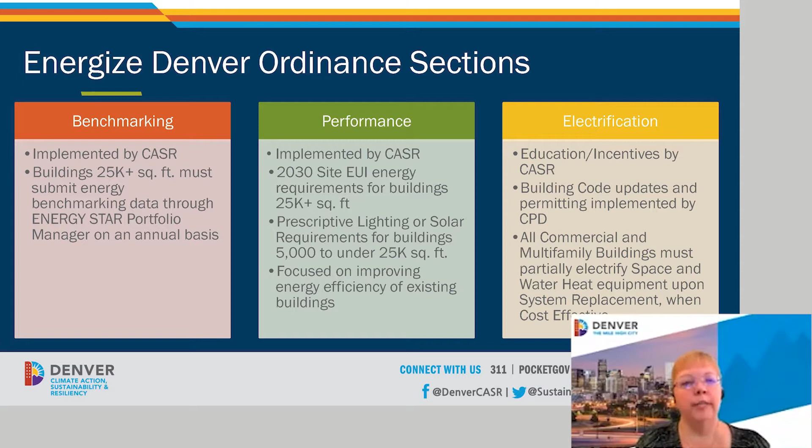Thank you. So like you said, I'm going to go over the ordinance and all of the sections and requirements that are in the ordinance. Let's go to the next slide. So it is split into three sections. The first section covers benchmarking, which we've done for a while now. The second is brand new, and it talks about performance targets. And I'm going to go into that in so much more detail, but this is just a summary slide. And then I'm going to go into very briefly the electrification requirements that are going to be built into the building code over the next 10 years.

So just a little bit of background. Go ahead and go to the next slide. So we have climate goals in Denver, which is the impetus for this particular ordinance. We've committed to eliminating greenhouse gas emissions by 2040. And for our buildings and homes, that means that all new buildings and homes need to be net zero energy by 2030, and all existing buildings and homes need to be net zero energy by 2040 if we're going to reach our goals.

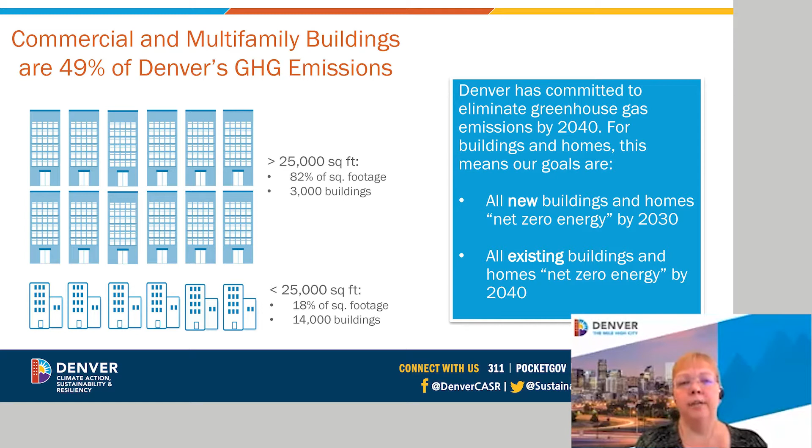Most of our greenhouse gas emissions are coming from our larger buildings that are over 25,000 square feet. It's actually 82% of our square footage that come from this particular group. And then we have a smaller group that has smaller buildings that is only 18% of the square footage. So in order for us to meet our goals, most of our performance requirements focus on reducing greenhouse gas emissions from the larger buildings.

So there are benefits for building owners and occupants. If we look at the avoided social cost of carbon, reduced utility costs and return on investments, that kind of thing, we will provide over $1 billion in benefits to the city as a whole. As buildings improve their energy use and lower the cost of operations, we'll become a more attractive city for businesses and residents. It also improves your return on investment, your property values, improves the building stock in the city of Denver, reduces energy bills and cost of operations, and improves indoor and outdoor air quality.

Next slide. So we put together an Energize Denver task force last year, worked through most of 2021, and gave them a goal of how do we achieve that net zero energy by 2040. And the design of this ordinance is what came out of that task force. They focused on improving health and equity outcomes, creating jobs, and driving climate solutions. So they had many task force meetings, lots of working groups and side meetings, and we looked at best practices across the country to be able to design this ordinance.

So I'm going to go into the first section, and it's the benchmarking section. So we have been benchmarking since 2016. It's all buildings 25,000 square feet and larger. You report your energy use to Energy Star Portfolio Manager. Our benchmarking requirements have not changed. So if you've done it in the past, it's the exact same requirements, and it is due on June 1st, which is only 2 weeks from now. So if you haven't submitted it, please make sure you do.

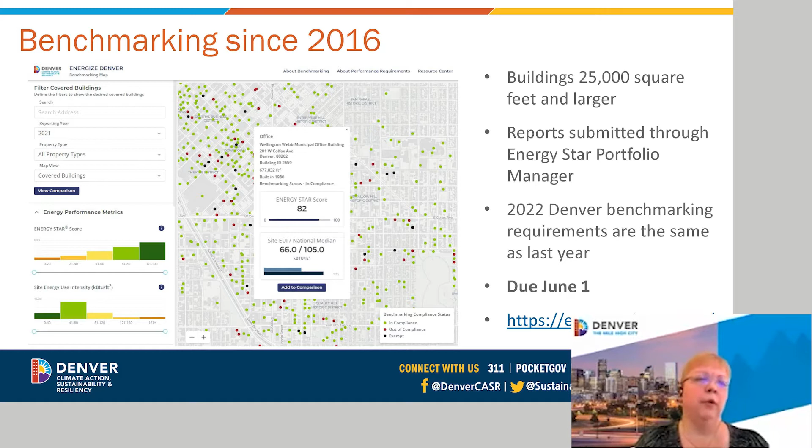We've also updated our benchmarking map at energizedenver.org to focus on site EUI and some other metrics. So if you'd like to go take a look at the new map, it's really neat and it has a lot more information than the old map did. So a new thing for this year is that the state of Colorado is also doing benchmarking for the first time. So they decided it was going to be buildings 50,000 square feet and larger.

It's done by the Colorado Energy Office. For this first year, it is due on December 1st, but then every year after that, it'll have the exact same deadline as we do on June 1st. They do have an annual filing fee, which is a little bit separate, different from us.

So if you're in the city of Denver or a city that already benchmarks like Boulder or Fort Collins, then we are actually going to submit your benchmarking report for you. So you send it in to us, we'll forward it to the state, but you then have to go to their website to pay the $100 fee to be considered in compliance. If you are not in one of those cities, you would just go directly to the Colorado website to submit your report.

So now I'm going to dig into the performance requirements, and this is probably where we're going to spend most of our time. The overarching goal for the performance requirements is to reach a 30% improvement in energy performance across all of those buildings by 2030. So to achieve that goal, we designed energy performance targets for 2030. This applies to all buildings over 25,000 square feet. It uses site energy use intensity, or your kBTU divided by square footage.

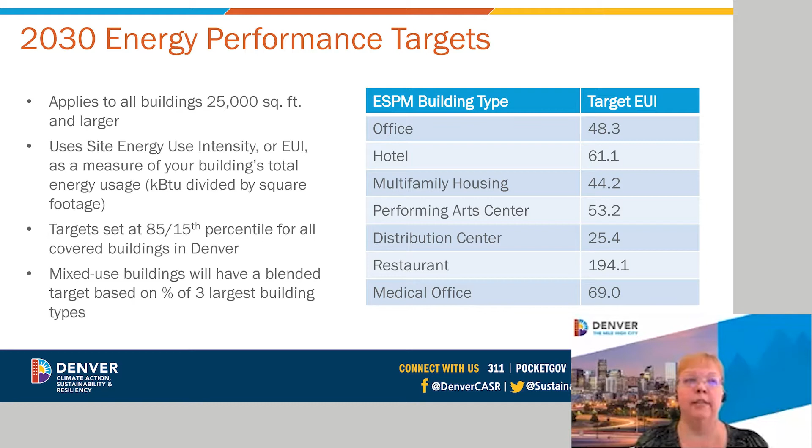So our unique building types were ones that we did not have a robust enough local or national data set to be able to set an EUI target. These include aquariums, convention centers, data centers, parking, utility, power stations, that kind of thing. And we just set a 30% reduction target instead of a site EUI target. Alternate compliance options are going to be important for this group because they may not be able to outright make a 30% goal. So if you are in one of these building types, you're more likely going to talk to our office once we design our alternate compliance options.

For manufacturing and agricultural, one of the interesting things about this group is that they have not been required to benchmark for the last 5 years, but we are going to be setting performance targets for this group. So we are setting up some focus groups to do stakeholder engagement over the next year with this group on how we get them to benchmark and then set performance goals that are equal to the 30% savings. So if you have one of these types of buildings, you will probably be hearing from us in the next couple of months to start that engagement process.

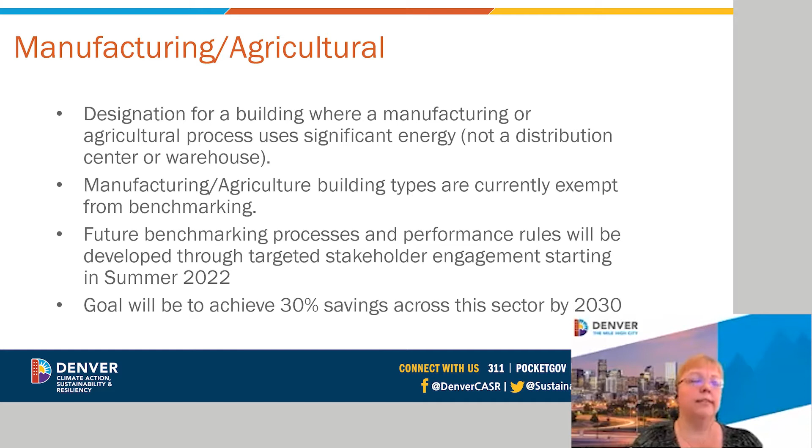So interim targets: we took that 2030 target and set a couple of interim goals to help all the building owners get to where they need to be in 2030. We set them for 2024 and 2027 by drawing a straight line from your 2019 baseline to the 2030 target and set those site EUI targets for those years. After you meet those targets, you have to maintain them. What is in the chart is what we are regulating. If a building wants to go faster, let's say get to your 2030 target earlier, you're certainly welcome to do this. This is just the minimum requirement: hitting those interim targets and then maintaining them indefinitely.

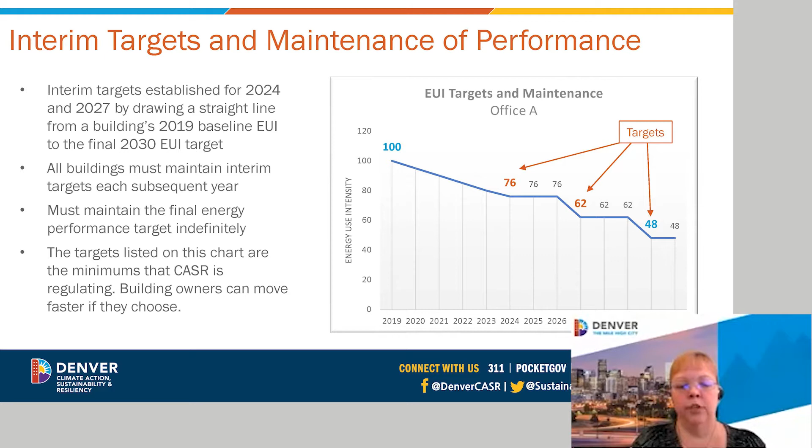So data correction, this is a really super important thing to be looking at for the next couple of months. Were you benchmarking your building properly? Your square footage is possibly wrong, or your property types are possibly wrong, or you are not accounting for high intensity spaces. Let's say you have an office building that is 90% office and only 10% restaurant. A restaurant EUI is in the 190s, so you could get a little bit of a break if you actually benchmarked that restaurant section.

It's not required by Portfolio Manager if you have less than a 10% property space use in your building, but what we're suggesting is that you do it anyways, because then your mixed-use target will give you a break on that restaurant instead of having to hit the 48.3 that an office is. So we want to make sure that everybody is looking at their benchmarking data very carefully over the next couple of months, and then asking for a data correction and getting the correct site EUI target assigned for your building based on what's actually in your building.

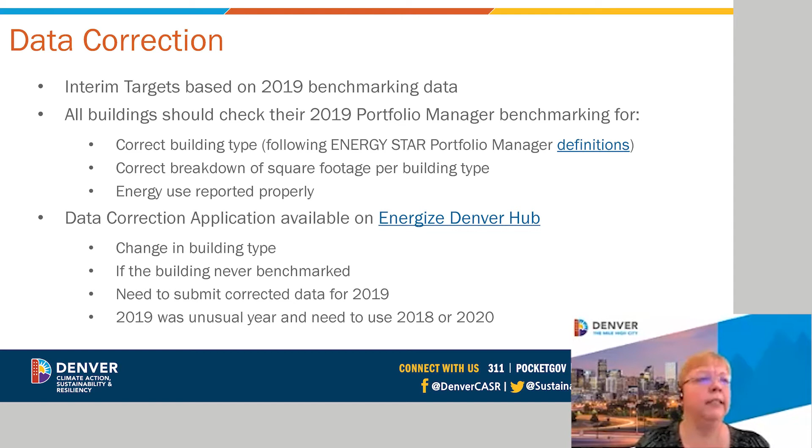So we also, as part of the program, have a solar credit. If you installed solar, it doesn't normally affect your site EUI. So if you're in Portfolio Manager and you put in your solar data, you will see that your site EUI doesn't actually change. It changes your source EUI. But what we want to do is give credit for local solar that's built and allow a credit off of the site EUI. We are still designing this credit.

There's some differences between the state and what they're designing on their performance credit. So this is not finalized yet. We are going to have a solar credit of some kind, but we still have a few details to work out and should be finalizing it over the next couple of months.

So our alternate compliance options: we are going to be allowing for inherent characteristics or specialized operations that might not be accounted for in your site EUI target. Over the next month or so, we're going to finalize some of these details on what could possibly be allowed to adjust your target. We are also going to allow timeline adjustments.

Let's say you have a major renovation planned for 2028, which means you won't hit your 2024-2027 target. We may, with some information and justification sent into us, allow for those interim targets to be missed as long as you agree to complete what you said you were going to do in 2028. So we're working on the details around that.

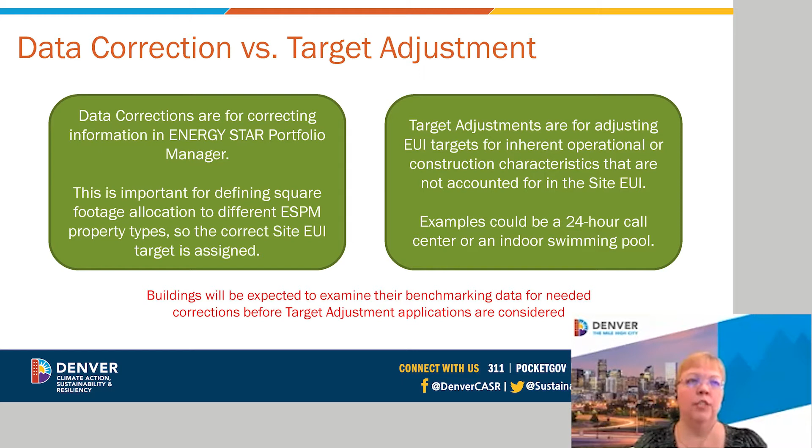So steam loop buildings. I've been getting a lot of questions about this particular group because we have about 120 buildings on this steam loop in downtown Denver. These buildings are going to be evaluated on a case-by-case basis under the alternate compliance options. More than likely, they will either get a target adjustment or a timeline adjustment based on what's going on. There are long-term plans in the works for the steam loop, but they are not going to happen by 2030 to meet our targets.

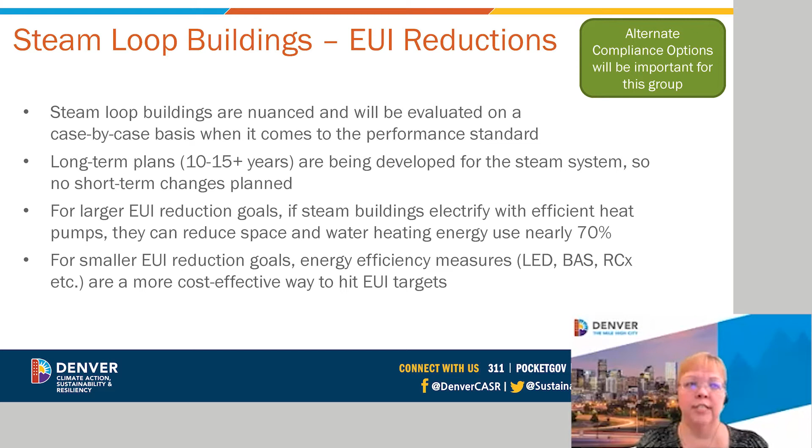So if you're one of these buildings and you have a larger EUI reduction goal, it actually makes sense to look at electrification because you can get some huge reductions by electrifying the equipment in your building and getting off the steam loop. If you have a smaller reduction goal, like you're closer to your site EUI target, it makes more sense to not worry about the steam and look at some of the other efficiency measures like lighting and controls and retro-commissioning.

So then we have a small building performance requirement. This is not performance-based, but it's prescriptive. So buildings that are between 5,000 and just under 25,000 square feet, by the deadlines according to their building size in the chart, are either going to have to do a lighting upgrade to LEDs or install solar that's worth 20% of the current energy usage. Now, if the buildings have already done that, all they have to do is turn in paperwork. It's a pretty simple requirement for smaller buildings.

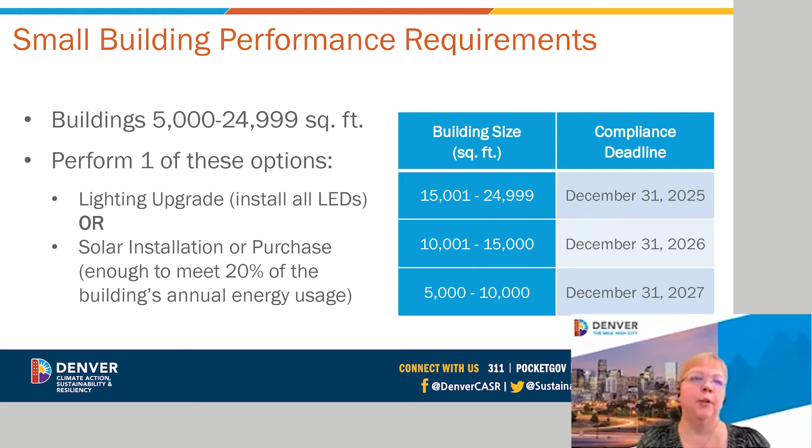So penalties, I get a lot of questions about penalties too. We are actually working out an implementation schedule. The way the ordinance language is written is that it's a certain dollar amount per kBTU of reduction not achieved. So what we would do is take the difference between your interim or your final target and see where you are for that year's performance, and then give it a kBTU dollar value of what you didn't get to the goal. So if you hit your goal, you're good, no penalties. If you didn't quite make it, then there would be a penalty on it.

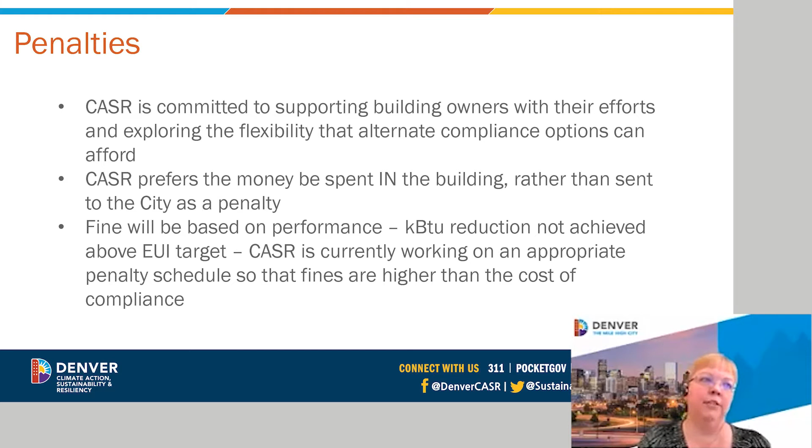But we really want people to spend the money in their buildings and reach those reduction goals instead of gathering money. Because if we do penalties, what we're going to do is reinvest it in energy efficiency programs. So what happens is if you don't invest in your building, we're going to give you a penalty and then spend your money in somebody else's building. So we really want people to do the work in their buildings. And that's why we designed the flexibility into the target adjustments and the alternate compliance to make sure that you're actually reaching your goals instead of paying a penalty. And those are going to be finalized also in the next month or two.

So the state is developing its own performance policy. They want to, by 2030, do a 20% reduction in greenhouse gas emissions, which is about equivalent to our 30% energy reduction savings by 2030. And so this is still only going to apply to buildings 50,000 square feet and larger, which is what their rule covers. And the task force meetings are going on right now through October; they actually have to get the recommendations to the Air Quality Control Commission by October.

And so if you're interested in seeing what's happening with the state task force, we have a representative from our office on that task force, and we're trying to create as much alignment with our existing performance policy as possible. But there have been some differences of opinion. So if you're interested, please go to their website.

So we're going to talk about renewable heating and cooling, and this is essentially about electrification of our equipment. And this is going to be implemented by Community Planning and Development because it's actually adjusting the building and fire code for the city. And they have lots of meetings going on right now to discuss how to implement this. So Xcel Energy is rapidly decarbonizing the grid. They have a goal of 80% renewable electrical grid by 2030, which is really crazy, and then hitting the other 20% by 2050. And you'll get a copy of these slides where you can click on all of these links. So if you want to see more about Xcel's plan, it's called the Xcel Energy Clean Energy Plan, where they've detailed exactly what they're going to do to hit that 80% renewable.

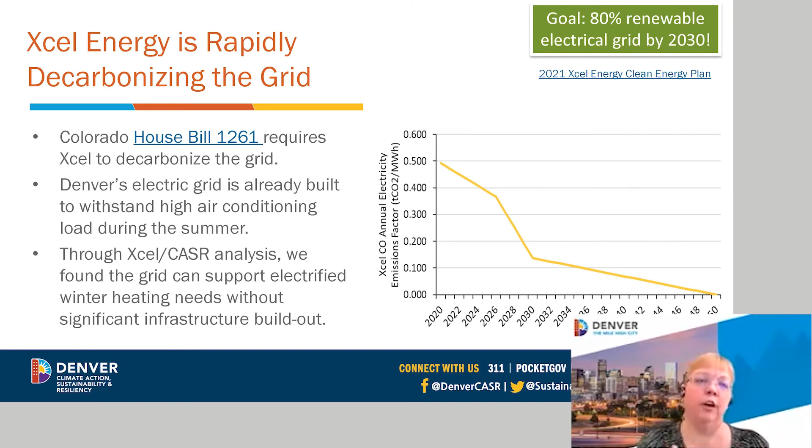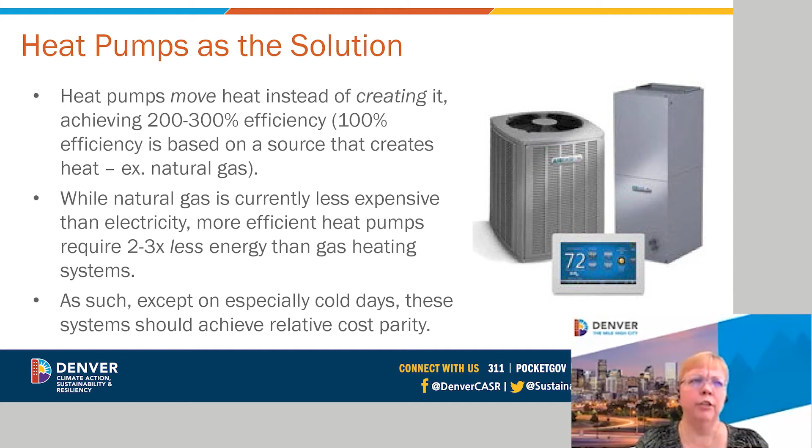So what we have to do is, if the electrical grid is renewable, we need to electrify our equipment and get off fossil fuels so that we are decarbonizing our equipment at the same time they're decarbonizing the grid. So it's talking about heat pumps. Heat pumps move heat instead of creating it. They're 200 to 300 percent more efficient than natural gas equipment. And while natural gas is currently less expensive, because you have that 2 to 3 times efficiency, you end up kind of hitting cost parity on the cost of your utilities after the return on investment on switching out your equipment.

So what we're working on are some updating changes to the code. What we're focusing on is that all commercial and multifamily buildings will eventually require partial electrification of space and water heat upon system replacement when cost effective. And those two concepts, upon system replacement and cost effectiveness, are very important to the way we are implementing this. So we're not asking all existing buildings to tear out all of their natural gas equipment as of January 1st, 2023. We're saying when your system reaches the end of its life and you are going to replace it, then we have a schedule of when electrified equipment would be required. And I'll go over that in the next couple of slides.

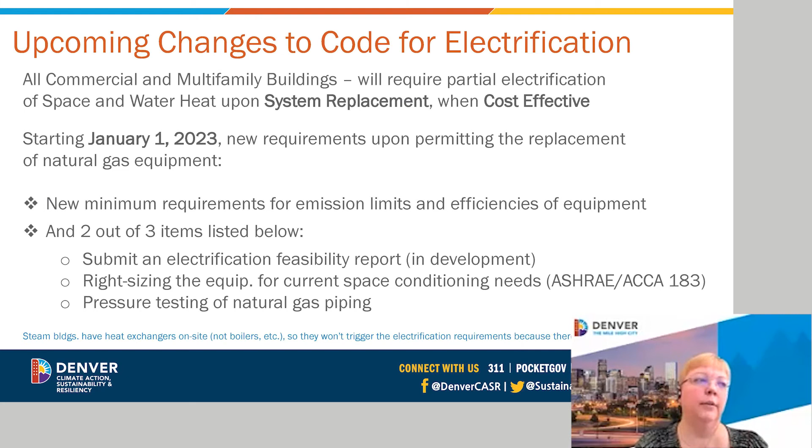You need to submit an electrification feasibility report, which is in development right now. You have to right size the equipment for your current space conditioning needs. In the past, everybody oversized their equipment to make sure that they were covered just in case, and we want everybody to right size instead of oversize. Or you need to pressure test your natural gas piping. We think most people are going to do the first 2 bullets because pressure testing is actually quite expensive.

So this is the schedule of when the building code is going to be updated. They're focusing on easy to electrify equipment for the 2025 update. So that would include furnaces, rooftop units, individual water heaters, and then there's this cost effectiveness test where we want to work with the market to start bringing the technology to a point where we have cost parity between natural gas equipment and electrification equipment. We have a lot of work to do on that, but we're hoping things will move over the next couple of years to make this possible.

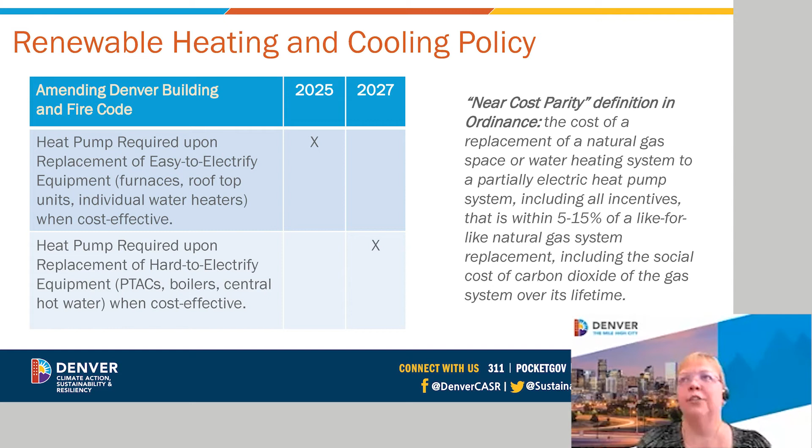And then by the 2027 update, we would focus on the harder to electrify equipment like PTACs, boilers, central hot water heaters when cost effective. Now, this is all the outline we have at this moment, but if cost parity is not achieved based on market specifications or what's happening in the market, then we would adjust the schedule accordingly. We really hope we're going to be able to work with manufacturers in the market to make this schedule possible.

So this is the outline of what is happening on the development of the electrification program. We actually had an RFP just close about a week or 2 ago where we're going to have a contractor on board that is going to help us design this. They're going to help us design the feasibility reports. We're going to have materials made to educate everybody. How do we review the submissions? We are designing pilots right now.

So if you are in a building that is at the end of your system life for natural gas and you want to look at electrification, you could possibly get some extra funding to be one of our pilots as we design our incentives. And then based on what we've learned from the feasibility reports and the pilots, we're going to be designing incentives that are going to help people electrify their equipment and pay for the feasibility reports. So all of this is happening over the next 6 months and a lot more to roll out after that.

So we are designing additional support and incentives to be able to help with all of this stuff that I just talked about. So we have our Energize Denver Hub as our website, which has lots of really great information and some really great materials. We're actually going to be designing a whole lot more content for that over the next 3 to 4 months. So go ahead and bookmark the website and then keep coming back as we add things.

And then we're designing additional assistance for under-resourced buildings. So these are buildings that are human service providers, nonprofits, where they may not have the funding or the staffing to be able to really take to heart and implement the site EUI targets. We're going to be providing them additional assistance so that they can actually reach their targets. So there are a lot of incentives and financing already out there, and we'll be adding to these, especially on the electrification side over time.

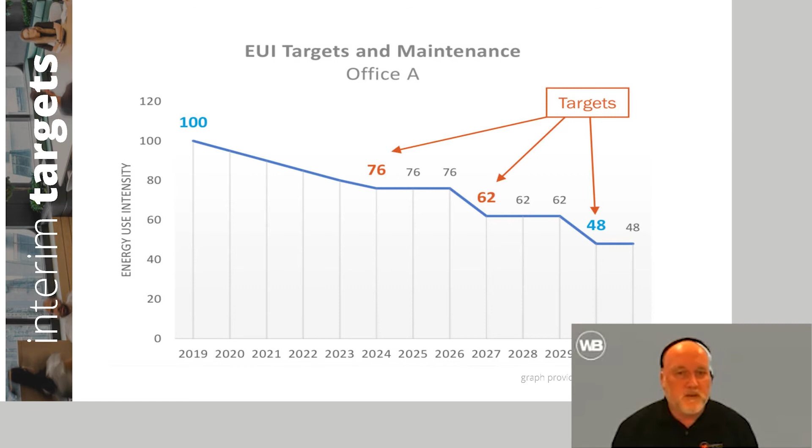So as Sharon mentioned, that energy assessment, just understanding the difference between those, and Sharon kind of touched on that. The energy assessment is more of a high level. If you have specific targets that you already understand, old equipment that can be replaced, looking at that at a high level. The next step beyond that is that energy audit.

So we're actually walking through that building and actually kind of tuning up the building in more detail, to where we're meeting with the facility managers that know the building the best, understanding how it functions and how it can be improved, and in the way of developing ECMs. So understanding the energy utility bills, how it's actually performing from a meter standpoint, from a schedule and operation standpoint with the staff.

And then the next step is, from all that evaluation, identifying the applicable energy conservation measures that could get that building to that performance target that they're looking for. And then in addition to that, there's also identifying retro commissioning measures, looking at, as I mentioned, tune-up, measures that can actually be corrected or updated, such as temperature setbacks, to actually improve without doing major investments. So this is an example of a detailed energy audit that we did.

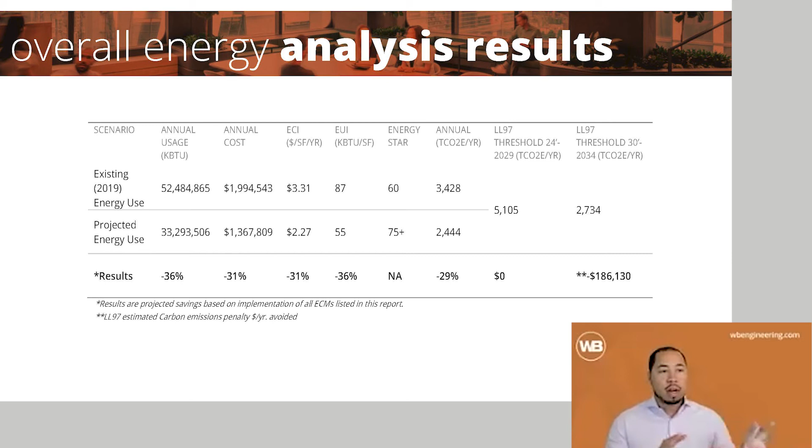This is adding value. So if we're looking at just simply cost, that operating cost is freeing up a lot of dollars for that building on an annual basis, and contributing to that initial capital investment. It's reducing the kBTU per square foot, and then looking at a better Energy Star score, and of course the annual emissions. So we'll look at all these and look at how it aligns with the energy ordinance.

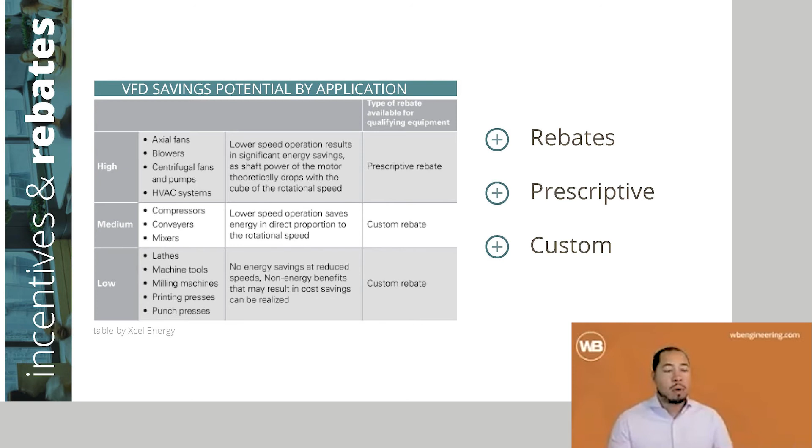And there's another one, just VFDs, looking at those prescriptively and identifying what can be offered to help implement those projects and get them done faster. And then again, another, just evaluating prescriptive versus custom and understanding how that can apply and help your building implement some of these capital improvements to your building.

As Marcus showed you, you should have a list after the energy audit, a list of ECMs and RCMs with estimated construction costs, return on investments, and associated reduction in EUIs. The next step is to develop a strategic plan to get you to your goal by 2030. So hopefully by implementing some or all of the ECMs and RCMs, those goals will be met or exceeded.

And we always suggest identifying the low cost, high impact projects from the list of ECMs and RCMs to work on first. For example, some of the RCMs that Marcus mentioned could include simple measures such as replacing broken sensors, adjusting temperature set points, night setbacks, operating hours for fans and pumps, and other pretty straightforward reprogramming and software control type scope items that can result in substantial savings. So there are substantial savings even by retro commissioning your building on a yearly or twice yearly basis.

So by selecting these types of projects, you can build momentum before tackling some of the more challenging and expensive high capex projects such as equipment replacement like chillers and air handling units. And if you are assessing a portfolio of buildings, we recommend identifying the worst performing buildings and working on those first, which will help you get out of the gate faster. So Marcus will now bring you through a couple of case studies that we performed in the last 18 months, which are a good example of the results you can achieve from a detailed audit.